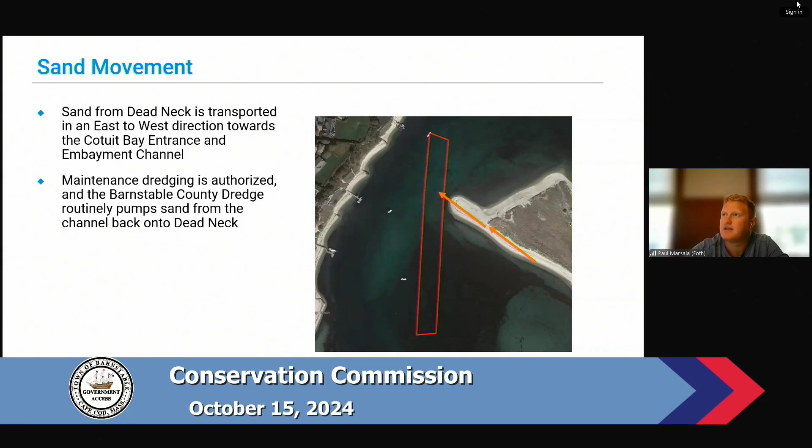When the Barnstable County Dredge came back this October to commence with the work, a new pre-dredge survey was conducted, and it was found that this spit had continued to extend over the summer months, and actually continued up on and over the currently authorized embayment channel.

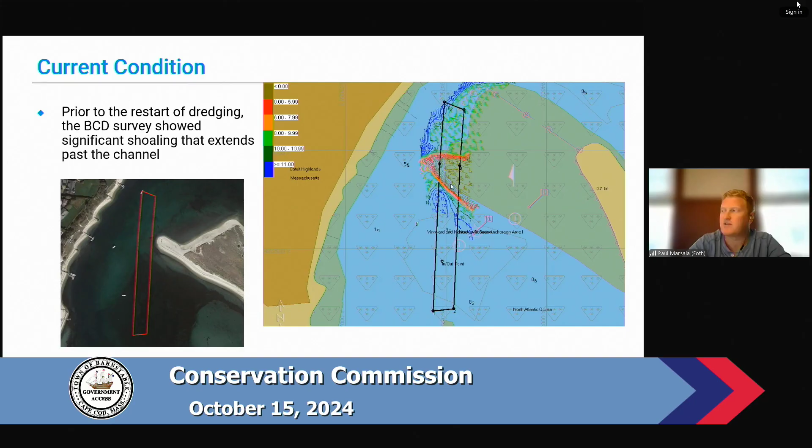So we have an emergency situation. This was identified immediately following the pre-dredge survey when we all sat and had a call looking at the data. The Barnstable County Dredge is still currently on site dredging the currently authorized limits, so work is continuing.

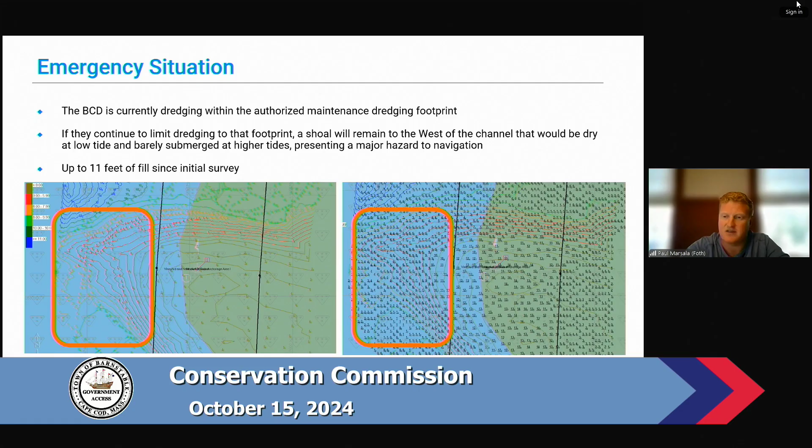So I'm not sure if it's been circulated to everybody, but the Harbor Master's Office has written a letter to the commission requesting that you authorize emergency dredging.

So with the Barnstable County Dredge on site, the town is requesting an emergency authorization to dredge an area approximately 100 feet by 100 feet to the west of the authorized channel to remove the bulk of this new shoal, in order to keep it from remaining a hazard to navigation after Barnstable County Dredge leaves.

Once they leave, it's uncertain, but it would likely be many years, could be 5 to 10 years, before they would be back to dredge this.

It's approximately 1,800 cubic yards, covering about 11,000 square feet. The current dredging, for perspective, on the entire channel is about 22,000 cubic yards. So this is not an insignificant percentage, but I just wanted to have that figure out for the commission to be able to put this emergency portion into perspective.

So this extended sand spit in the request for the emergency dredging is of the same source as the already authorized dredging. So the material would be proposed to be placed back onto Dead Neck under the same order of conditions currently issued, and all the same conditions would apply.

We did take another look at the eelgrass survey from fall of 2024, which showed no eelgrass in the proposed emergency dredge area.

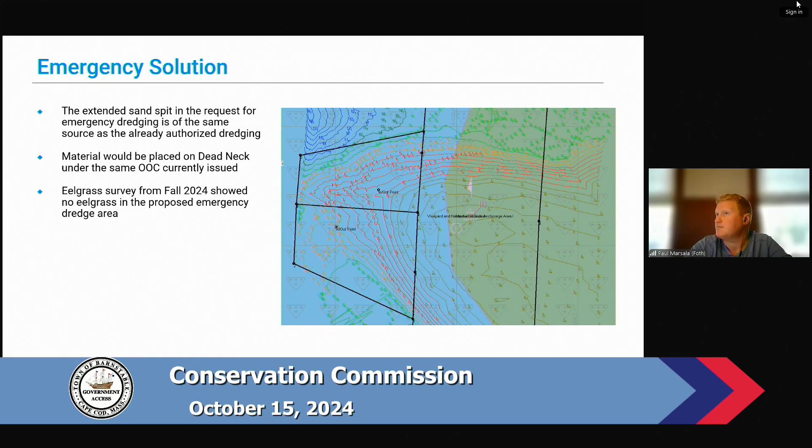I just wanted to run through the process in case folks aren't familiar. The harbor master has already sent a letter to the commission expressing his opinion that this emergency action is necessary to prevent a threat to safe navigation and public safety.

We've contacted David Wong, Mass DEP 401. He's been informed and supports the action if the Conservation Commission agrees that this is an emergency action, and he has regulation supporting that. I won't read the whole regulation here, but it essentially instructs the 401 agency to concur with the commission should you find that it's appropriate.

Following a certification as an emergency by the commission, the town would go to Mass DEP Chapter 91, Office of Waterways, for emergency authorization for dredging, which would be followed by an amendment request. Then, should the conservation commission and Chapter 91 agree that the town may proceed, we would also consult the Army Corps of Engineers.

Everybody has been unofficially notified that the process is underway, so it won't be a surprise to any of these folks. But given the timeline that we have while Barnstable County Dredge is still on site, I just wanted to outline what this procedure would be in case there are questions. And I could provide any additional information to the commission, or answer any questions or comments that you may have.

Thank you, Paul. Any questions from the commissioner? Bill? I'm all in favor of it, but I missed how long it took for it to accrete 11 feet of sediment. How long was that?

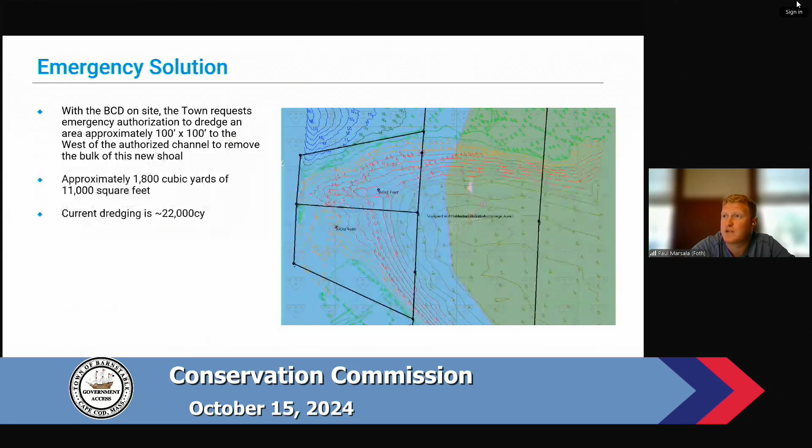The initial survey was when? So this was 2023. I actually have, if you don't mind, I can pull that up. I have the dates of the survey here in another window. You're talking a year? A year and a half.

So what had happened during these storm events that we think is probably driving this condition? There was a breach completely of the area just to the west of the jetty on the eastern side of Dead Neck, and when that completely breached, the flowing of waters in and out must have or may have increased the rate. But no, this is not a typical sedimentation rate that has been seen in this area, as far as I can tell. Thanks, Bill.

Louise? That being said, assuming we approve this, my question is, does this now become the approved dredging footprint, or is this every time it comes up an emergency situation? Whichever it is, we probably should be clear about it in our approval.

As far as the authorizations from you folks at the commission, this would not be an addition to the footprint. My understanding, once we take an approval from the commission to Chapter 91, it would be a temporary amendment, so it would not be included as a maintenance for the next iteration of dredging.

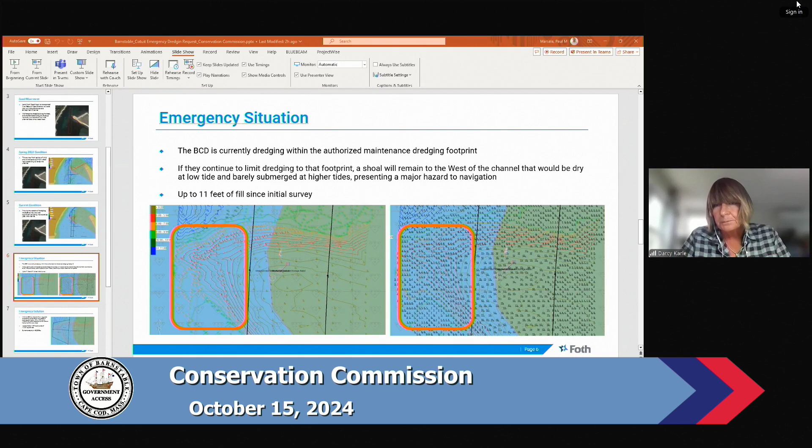But no, that's okay. So this request is for a support letter from the conservation commission, right, Paul? So this would be, and I will pull this form up for viewing. I have sent it to Darcy as well. This is a sample, but I've sent the Word file, I believe, over to Darcy. So this is a sample from a different project, but there's a WPA wetlands protection emergency certification form.

That would be signed by the commissioners. This is what would be moved forward in the short term in lieu of an order of conditions. Had this event not be so closely tied to a dredging project that already has an order of conditions, we would be doing an after-the-fact NOI and going through the process to get an after-the-fact order of conditions.

Being that this is essentially amending a project that's ongoing, I'll leave that up to the commission on how we proceed after this emergency is declared and moved forward. We can definitely talk about administratively whether the commission would like an after-the-fact NOI submitted just for this, or how you would like to proceed with that. Thank you.

So if I understand correctly, you're asking us the conservation commission to approve this as an emergency declaration request plus a support letter, correct? I believe that this form is sort of the support letter that was referenced. Yes, we're familiar with that form. I'm good with it.

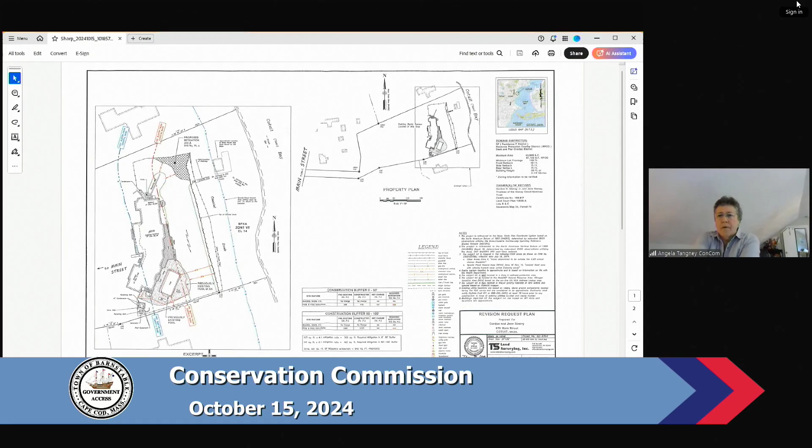Thank you, thanks Arlene. The second revised plan is Terry L. Simpson, trustee, SE3-6090, this is 525 South Main Street, Centerville. Good afternoon, John O'Day from Sullivan Engineering Consulting. I'll work on bringing up the plan for you all. This project at 525 South Main Street was to relocate and renovate an existing dwelling and also relocate the driveway. The house has been picked up and moved.

As we staked out the approved driveway, so the existing driveway, we gave an overlay. The existing driveway is highlighted in pink. The wetland is up in this corner, northeast corner by South Main Street. The approved driveway was in orange.

As we staked that to start construction of the walls coming off of the house, it became clear that it was very difficult maneuvering into this lower level garage. So we are here asking to change that location to what's shown highlighted in purple.

Obviously this is still a significant increase in separation from the wetlands. We still have a reduction in hardscape in the 50, and we have updated the buffer zone calculations and expanded that mitigation area, some of it now being on the landward side of the driveway. I'd be happy to answer any questions.

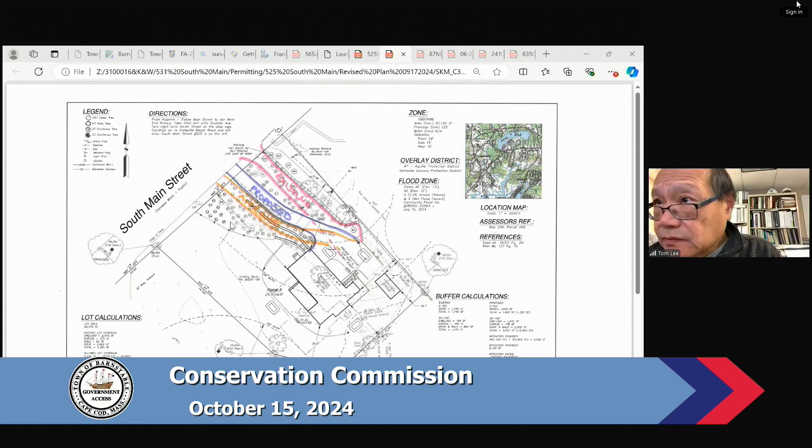Thank you, John. Any questions from the commissioner? Seeing none?

Could I have a motion to approve the revised plans as submitted? So moved. Second. Roll call. Abodeely, aye. Foster, aye. Hearn, aye. Lee, aye. Tangney, aye. That's unanimous. Thank you, John.

We have 7 easy certificates of compliance. The first one is John A. and Colleen Borsali, and they have two SE3 numbers.

The first one is SE3-6002 and SE3-6103. The third one is Thomas H. Lowell, SE3-5017. The fourth one is Pamela Alice Simons, Elder, Trustees, Anchor to Windward Real Estate Trust.

SE3-6051. Barbara C. Dorothy, SE3-5806. Town of Barnstable, DPW, SE3-5212. And Gregory J. and Julianne P. Pintos, Trustee, JDC Ocean Avenue Realty Trust, SE3-5943. Could I have a motion to approve?

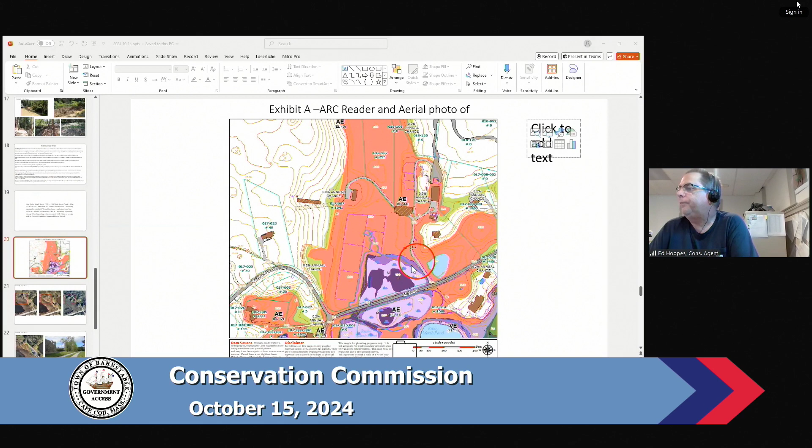So the area, I think everybody's familiar with New Rushy Marsh Farm. The area in question is right here off the main driveway, just a little bit beyond where the gate is for the property. You can see what was going on here.

The area in this left photo has always been an existing area like this. The applicant had come in a few years ago to do a Japanese Zen garden and yoga studio over in this area of the property. They came in to amend that order to add a sculpture in this area, which was very close to the wetland resource area. The commission did give permission to do that moving forward.

So in early 2024 the work began, the sculpture got installed, and then apparently, for reasons unknown, they continued to do more work up in this area where they have now replaced and filled wetland and buffer area. Now there is an existing manicured lawn, along with some new trees. The blue area was a pre-existing area, permitted where the sculpture was permitted. The yellow area is roughly the area that was impacted without a permit. And here's the sculpture, and this is the area that got changed around.

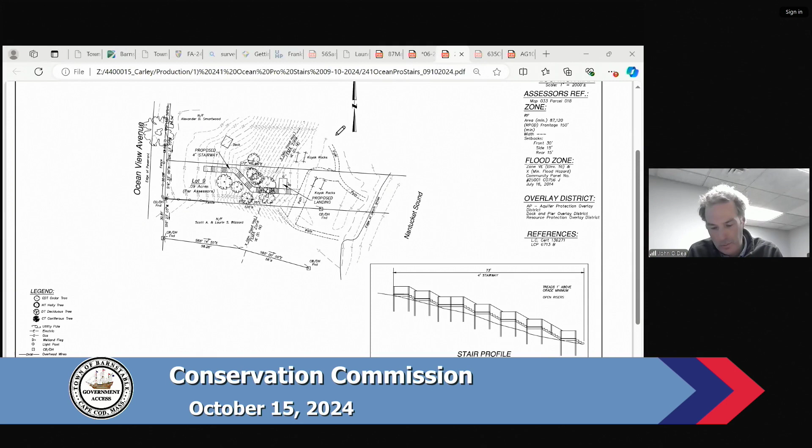Hello. This property is on Ocean View Avenue. It is one of a handful of beach lots that the family had historically owned on the street. It's the last one that remains within the family. Very simply, they're looking to get a set of stairs down to the beach area so that they can continue to have access.

We came up with a design that we think traverses the bank so as to avoid the trees, a 4-foot wide elevated stairway, pretty straightforward, I hope. We're here to answer any questions the commission may have on it.

Thank you, John. Questions from the commissioner? Anyone?

Pete: So I am noticing a landing on this set of stairs. And before I make any votes on this, I'd like to hear a justification, because often we do not have landings on a staircase over the bank, as it essentially shades any vegetation underneath it. It's not, to my knowledge, been common practice. So please make a case for it, Mr. O'Day. So I think that this site is a little bit unique in that we're not attached to a house.

So it's not like we can bring our beach furniture up to the house deck and put it on there. It's a small area. We put it down below the bank, as opposed to one of the properties they had before which had a deck at the top of the bank where things had been stored. We've really tried, with the applicants, at their direction, to minimize any view of this structure from the street. They're trying to preserve the natural vistas off of Ocean View Ave. There aren't a lot of them left. So we just tried to create a place and not be on the bank where we're fighting grades. It seemed like a good place to create a little landing area.

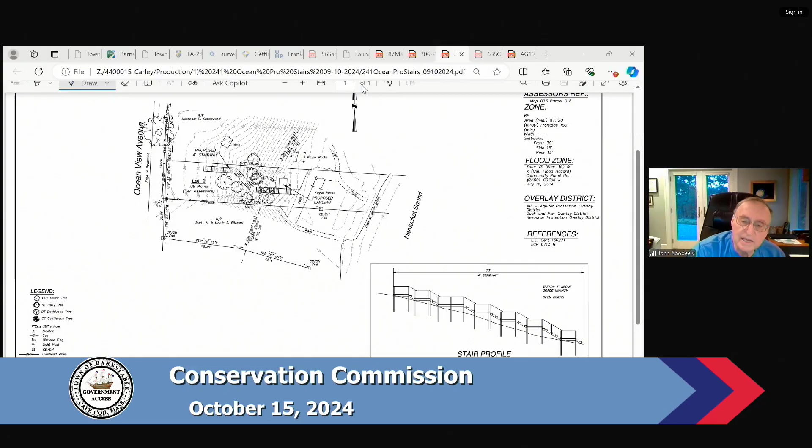The only thing, John, I thought of that point, but if you backed up and put a landing halfway down, that's the more common thing we've seen and it's easily approved. But then you're right on the vegetation in the bank. It would be a lot worse, right, John?

It'd be a lot worse to put it there from an environmental point of view. We had this discussion with the applicants at the beginning—that was their first take on where would be a great place to have it. My response was, getting it in the bank is actually... we've got open areas above the bank and open areas below the bank, but we're just skirting this through the cedar trees that are out there. I think there's a place where we could accomplish it with less impact.

Thank you, John. Any public comment on this one? Seeing none.

Tom, in the past what you've done, in order to help out the applicant and the owner, is take a straw vote. Now it looks like it's going to go down. John could just ask for a continuance and submit a revised plan without it. But if he gets a no, then he's got to start all over again.

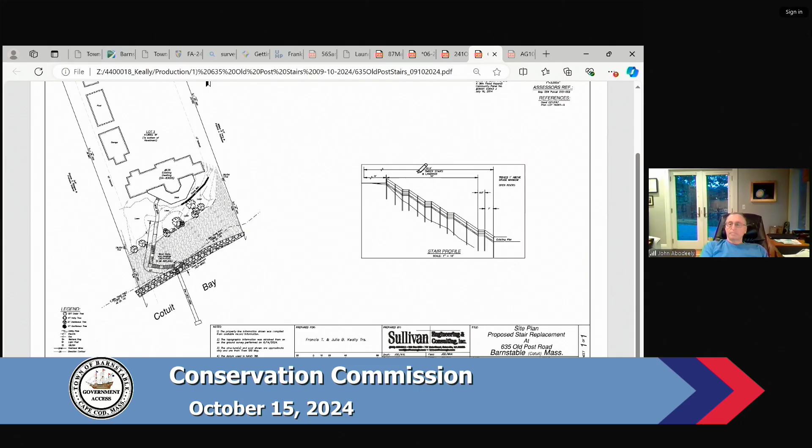Could I have a motion to approve this project subject to a revised plan showing the downward lighting along the stair, and a pre-construction meeting, with the construction protocol submitted 4 weeks prior to the pre-construction meeting? So moved. Second. Roll call.

Tangney, aye. Sampou, aye. Lee, aye. Hearn, aye. Foster, aye. Abodeely, aye. Thanks, Angela. Unanimous. Thank you. Thanks, John.

We have the next NOI: Josh Blinkley, Portable Constructions Company, Inc., proposed 4-bedroom single-family dwelling, detached 1-bedroom accessory dwelling unit, driveway, and associated utilities at 56 Red Wing Lane, Barnstable, as shown on Assessors Map 318, parcel 007.

Good evening, Chairman Lee, members of the commission. For the record, my name is Dan Ojala. I'm a land surveyor and also a civil engineer, working at Down Cape Engineering for the construction company. We're doing 56 Red Wing Lane. This is up in the northeast corner of town, almost into Cummaquid.

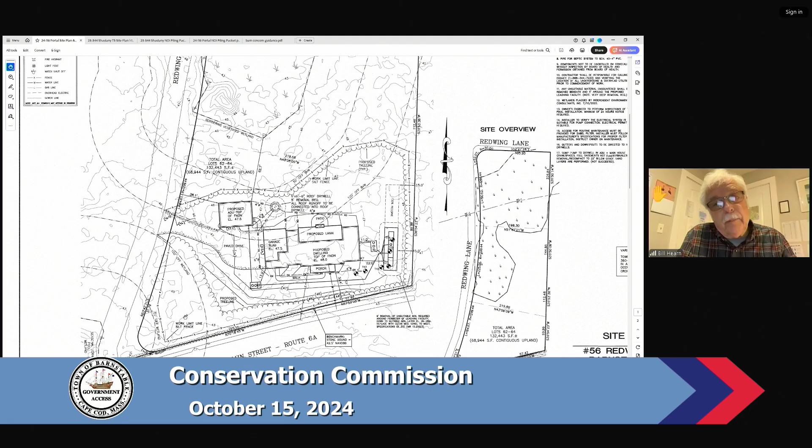In the lower left-hand corner there's a quote-unquote vernal pool, and vernal pools are important rearing habitat for fairly rare amphibians. According to the Wetlands Protection Act regs, a vernal pool habitat basically extends out 100 feet, and you really should not be doing anything within 100 feet of it. I notice on this plan that you have the silt fence and work limit line tucked right down, about as far as you can, and yet there's really nothing going on up to the 100-foot wetland line.

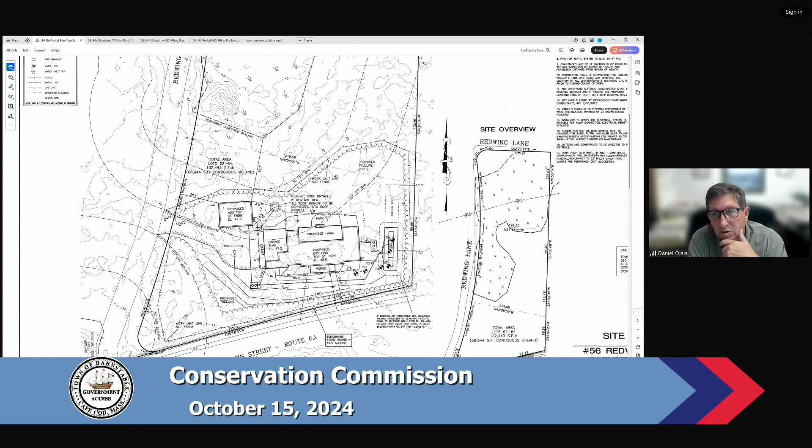Can you move that lower corner up to the 100-foot line just to stay out of the vernal pool habitat? That's a great comment, I hadn't really thought that through, and there's no reason we can't keep that at the 100. It's not a certified vernal pool, but it is a ponding area for sure, and may well be a vernal pool. The salamanders and wood frogs will basically climb out of their pool and migrate and utilize that habitat right there, which looks like a wooded area.

So thank you for, if you can move that out—that's my only concern. Happy to make that revision. Thank you. Any other questions from the commissioner? Seeing none.

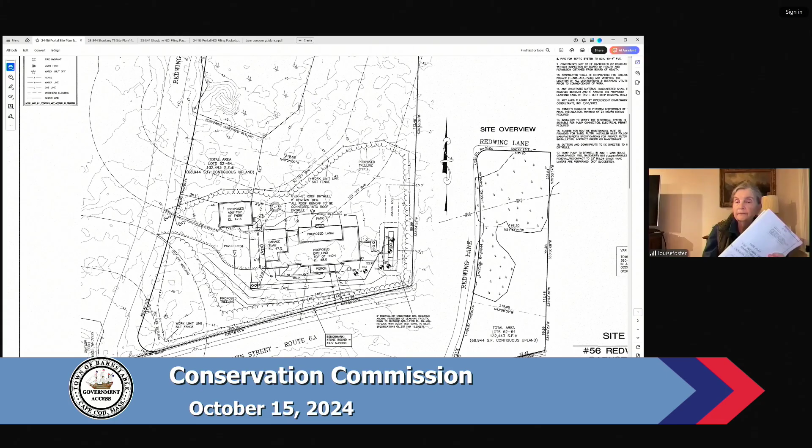Channel 18, any public comment on this? Seeing none. Could I have a motion to approve this project subject to receipt of a revised plan showing the relocation of the work limit line with the silt fence outside of a 100-foot wetland limit to the vernal pool, if we could add—just in that lower corner.

So moved. Second. Roll call. Tangney, aye. Sampou, aye. Lee, aye. Hearn, aye. Foster, aye. Abodeely, aye. That's unanimous. Thank you.

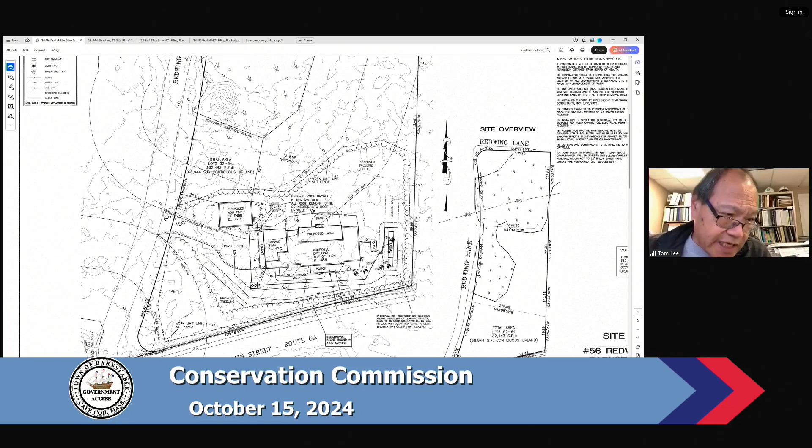The second one is David Shastany, proposed single-family dwelling at 306 Lake Elizabeth Drive and 61 Soundview Road, Centerville, as shown on the Assessors Map 227, parcel 050 and 097. Good evening, again for the record, Dan Ojala, surveyor and civil engineer with Down Cape Engineering, helping the folks out at 306 Lake Elizabeth Drive with a raise and replace.

The razing or demolishing is actually already done. As we put in the narrative, the old house that was up in this area was already taken down because it was in a sad state of disrepair, and just a little shed is the only thing on the property up in the corner. So the good news on this one is undisturbed 50-foot buffer and then some. The work limit line is along an existing gravel drive, which is 60 to probably close to 70 feet off the wetland, so we'll establish a firm silt fence to contain construction debris and any silt.

We'll run a new water line in off of Soundview, and the work proceeds almost all of it outside of the 100. There's a little bit of the deck and a couple of stairs within the 100, and that little bit of water line, but everything else we've tucked as far away from the wetland as we can. I think it's a good project, very similar to what was there before—again, fully protected 50-foot buffer plus. I'll be glad to answer any questions you have on this matter.

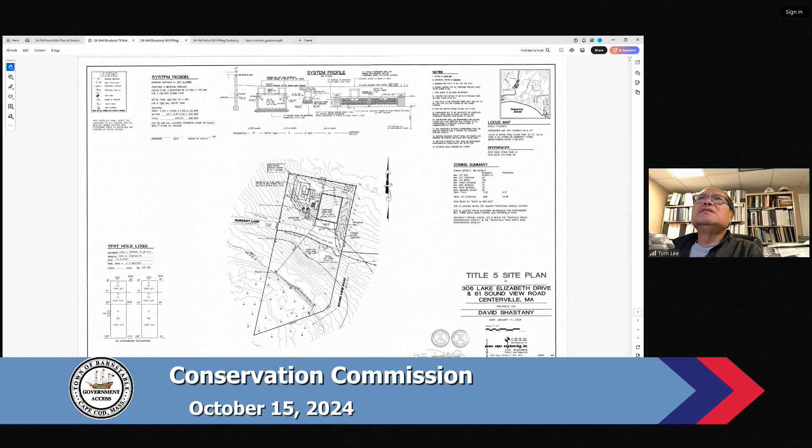Channel 18, any public comment on this? Seeing none. Could I have a motion to approve these projects as submitted? So moved. Second. Roll call. Tangney, aye. Sampou, aye. Lee, aye. Hearn, aye. Foster, aye. Abodeely, aye. That's unanimous.

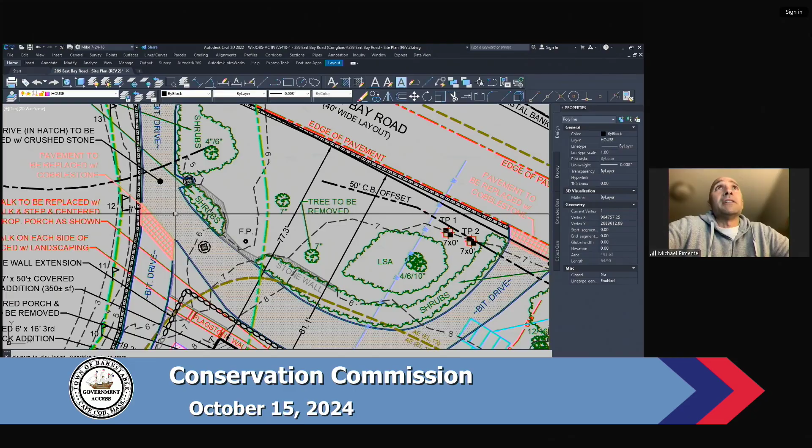There's also a kind of 1.5 foot tall stone boulder wall that starts here and goes along the edge of the driveway, stopping somewhere over here. It's dilapidated and falling apart, so they want to rebuild it in the same place and extend it where you see the darker blue stone wall. They also want to add a couple of cobblestone aprons, 3 of them exactly: one at the driveway entrance, another at the other driveway entrance, and finally at the interface between the new crushed stone driveway and the bituminous driveway, adding another cobblestone apron there.

Let's see, I think that's about it. Everything else is going to remain the same. The septic system has gone in and it's already been inspected by the town. So they're currently moving forward with the approved work, but they didn't want to move forward with any more of the work because part of it hasn't been approved by the commission yet. So that's why we're here, just to get the amended order approved so they can continue on with the job. With that, I'll take any questions.

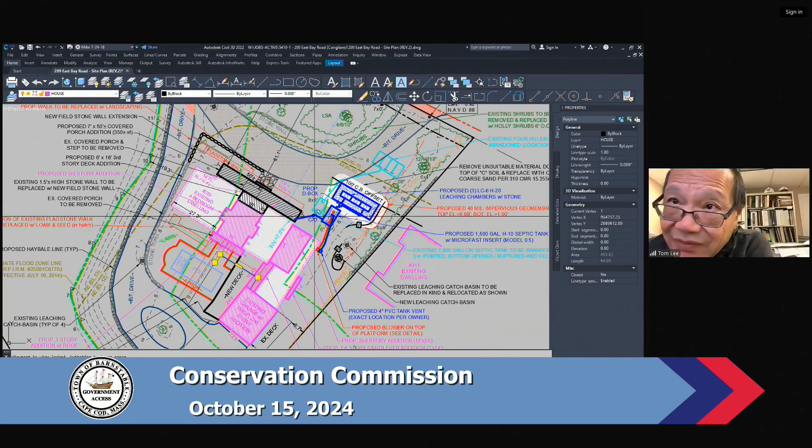Any question from the commissioner? John? Just a comment - I was out at the site, looked at the plan, and it would really be helpful for me in the future, whether it's a revised plan or amended order, to show what was already approved and what is clearly being asked for that's different. It was very complex for me. Maybe it's just my old age, but I struggled with it. Just a comment for the future. Okay, will do.

Who else has comments? Any other comment from the commissioner? I'm not seeing anything here.

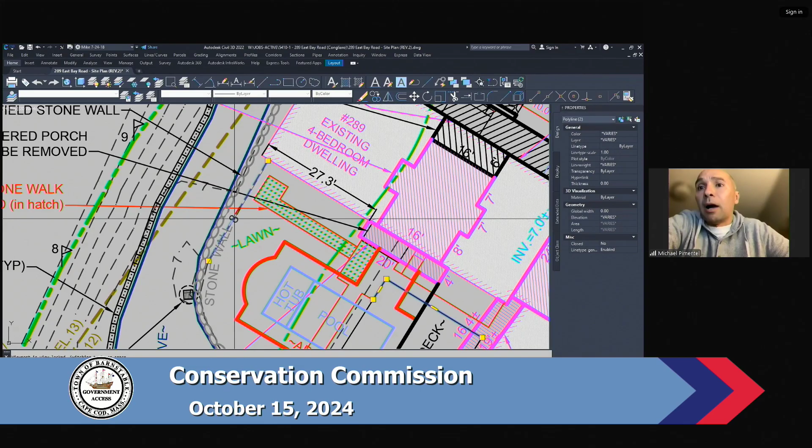One thing, Mike, for the stone wall you are putting on, typically we would require a top of wall elevation showing on the drawings. Say that again? You'd want to see what? Typically, on the top of the stone wall, we need to know the top elevation. Okay, there's a contour that runs parallel to it - you see this 8 contour right here? That's the top of the wall, actually. It's about 1.5 foot tall wall. So all I'm looking for is that in the revised drawing, can you put the top of the stone wall elevation on it? Sure, we could do that. It's just a label to say how high, a couple of feet, that sort of stuff. We could show top of wall elevation and bottom of wall elevation at a few spots along the wall.

Oh, and I do want to mention that we recalculated the amount of hardscape proposed for this project. Originally, the hardscape proposed was essentially net zero - no additional hardscape, therefore no planting mitigation was required. In this revised plan, we've actually decreased the amount of hardscape by approximately 729 square feet. So again, no planting mitigation is being proposed. And this 729 square feet does not include the replacement of the bituminous driveway turnaround with crushed stone. Just wanted to add that.

One last chance, any question from the commissioner? Any comment, is there any public comment on this one? Channel 18? Seeing none.

Could I have a motion to approve this amended order subject to receipt of a revised plan showing the top of the stone wall elevations? So moved. Anyone second? Second. Abodeely, aye. Foster, aye. Hearn, aye. Lee, aye. Sampou, aye. And Tangney, aye. That's unanimous.

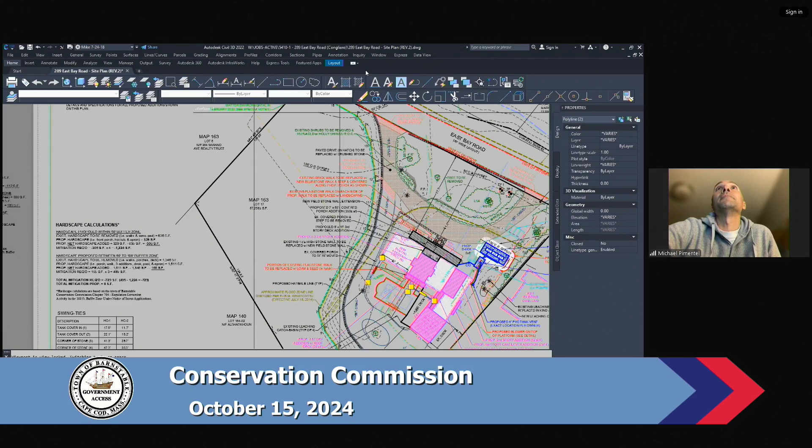Yeah, good night. And we have one continuance, Mark Casper, CB Enterprises LLC, enhancements of coastal bank by the removal of invasive species, selective pruning of lower and fallen branches, and planting of native species. Also repair and maintenance of existing brick retaining wall and steps at 315 Main Street, Osterville, as shown on Assessors Map 164, parcel 003-001.

This is a continuance from October 1st. The applicant has requested a second continuance to October 29th without testimony. Could I have a motion to continue this to October 29th? So moved. Second. Roll call. Abodeely, aye. Foster, aye. Hearn, aye. Lee, aye. Sampou, aye.

And Tangney, that's unanimous. And we have 3 sets of minutes - September 10th, September 17th, and October 1st. I move to accept the minutes for September 10th, September 17th, and October 1st.

Second. Roll call. Abodeely, aye. Foster - for the first two, but I have to abstain for October 1st. Okay, that's right, you weren't here. Hearn, aye. Lee, aye. Sampou - I think I was missing one of those, but yes, I have. Same one, yeah, October 1st. I got it. And Tangney, aye. So we had 4 for the first. We're all set.